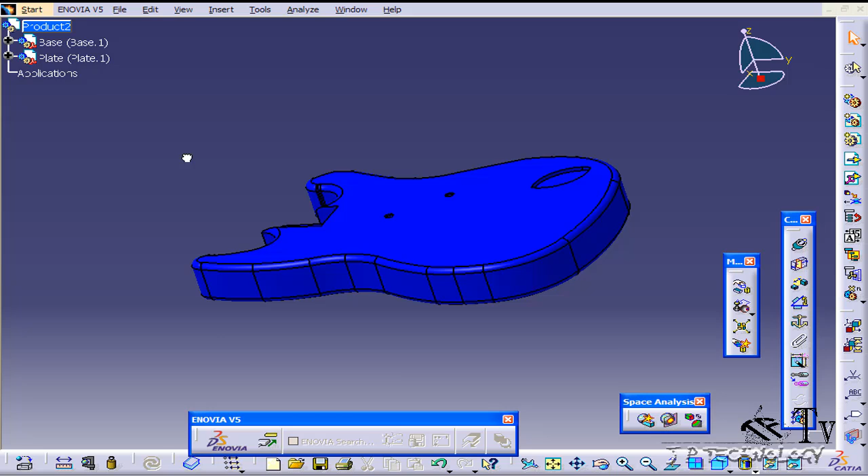Now let's do another existing component. Click Insert, Existing Component, and again you have to click on the product. This time let's put in plate, click open. Now the plate, as you can see, is kind of layered on top and squished into the base.

So that's one of the problems with doing the existing component just by itself. You're able to throw it in quick, but you don't really have a position to throw it into. So let's delete this plate.

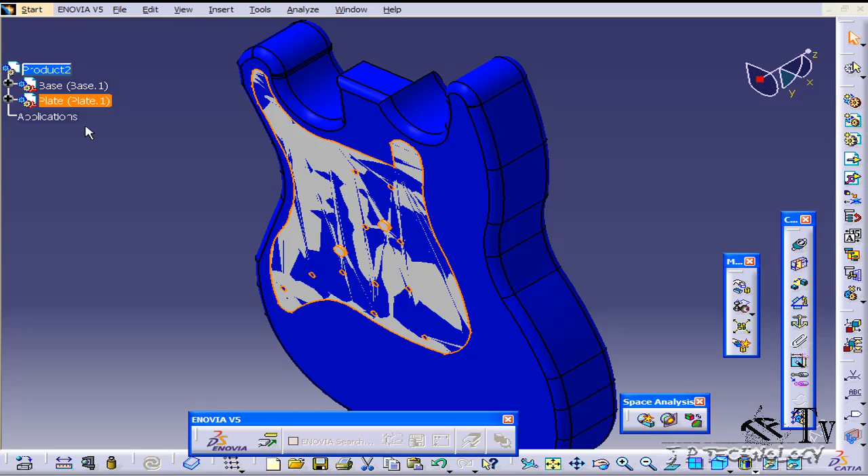And let's do the same thing, but this time we're going to insert it with position. Click Insert with Positioning, click the product, click the plate again, click Open, and now you can see again it's in the same position.

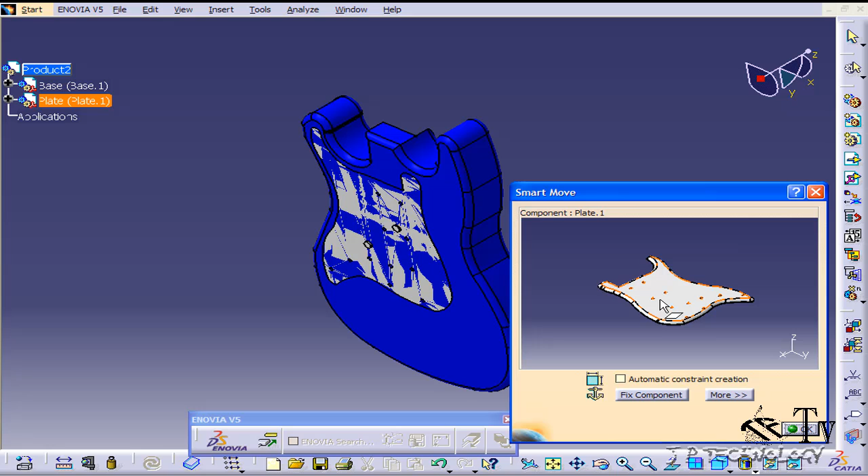So it's kind of like the problem we have when inserting components — we're going to have it smushed like that. What you're able to do though is just move it around in here. You can toss it around, or click on here and just move it around. Once you've done that, just click OK, and now both of them are free to click, access, and maneuver.

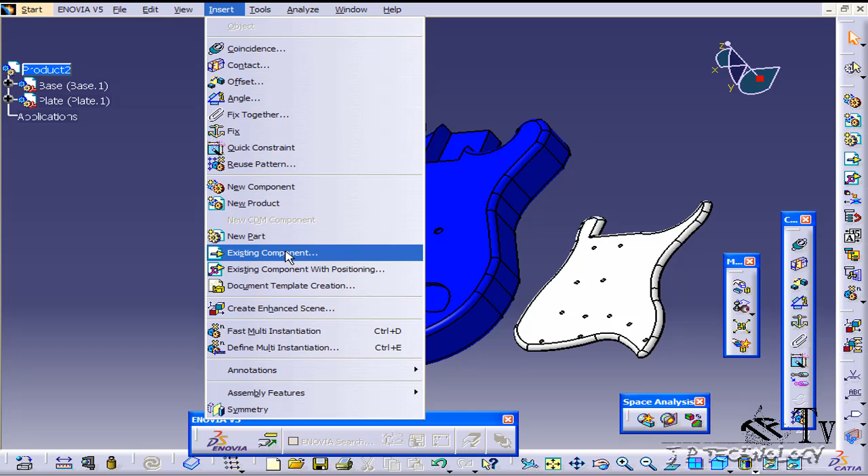So when inserting components, make sure that you click which product you want to put your components into, so which assembly, and then from that you have to insert them. So inserting the component, or you may have to insert with positioning as we had to here, because we need to move it around from the origin, as both of them kind of share the same space in their own component files. They're going to share the same space in the assembly, so you need to move it around before you actually do position it.

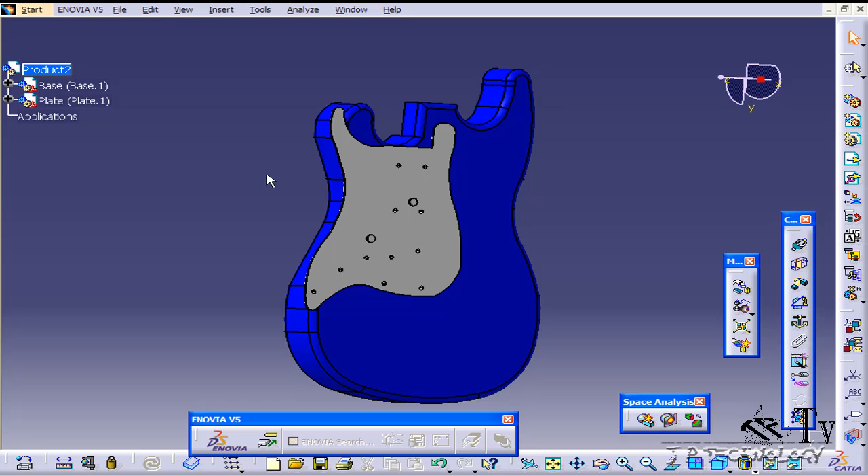And that concludes our tutorial on inserting components within Catia v5.